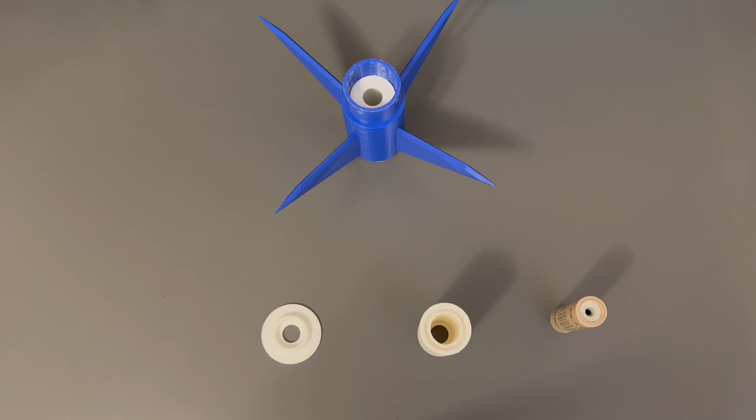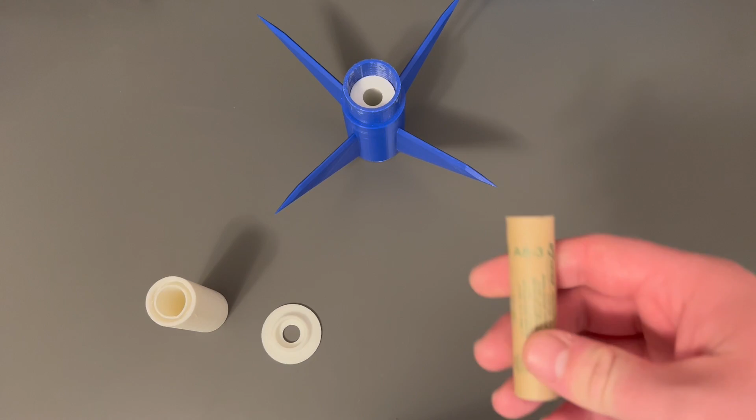Today I'm going to be updating you on the motor mount design that we did in the last video. I went ahead and printed this design and noticed a couple mistakes that I made. First off, let's talk about the fitment of the engine with the motor. If I go ahead and insert the motor here, it's very difficult to get in there.

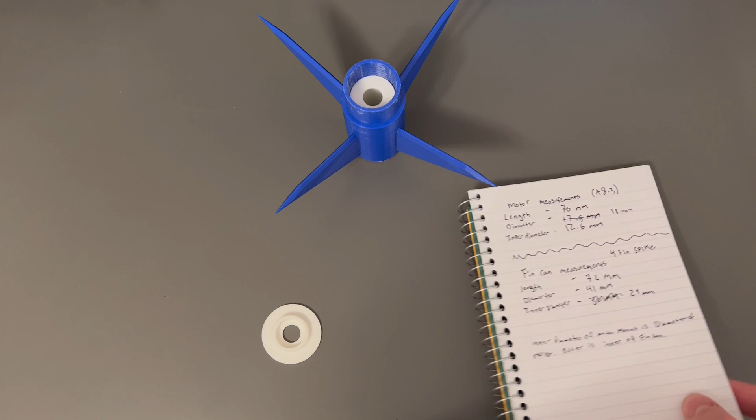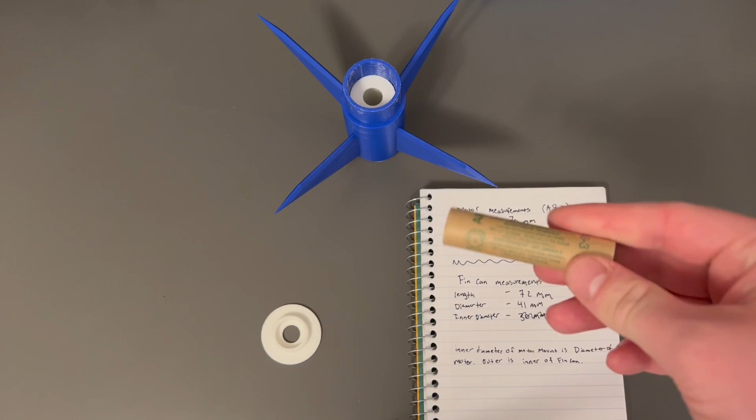That is because if we take a look at the notes we made, I took the diameter of the motor at 17.5, but in actuality it is 18 millimeters. I did some research, and both the A, B, and C motors have an 18 millimeter diameter, so I went ahead and updated that.

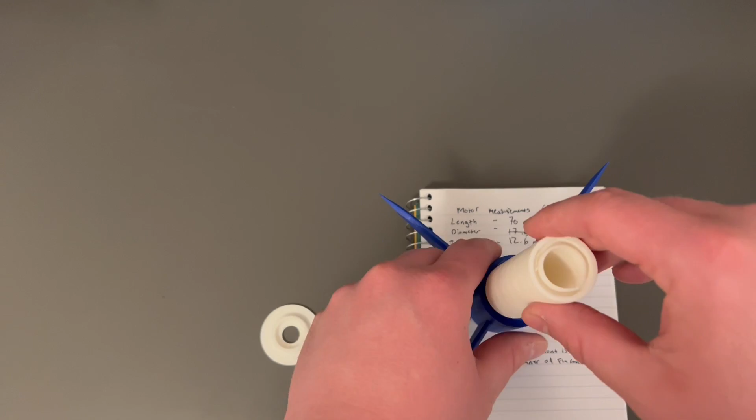Secondly, when I would attempt to put this inside the fin can, I'm going to put it in upside down since I have the other one inserted. It's a very snug fit, which is good because no glue is needed, but it means you can't take it out if needed.

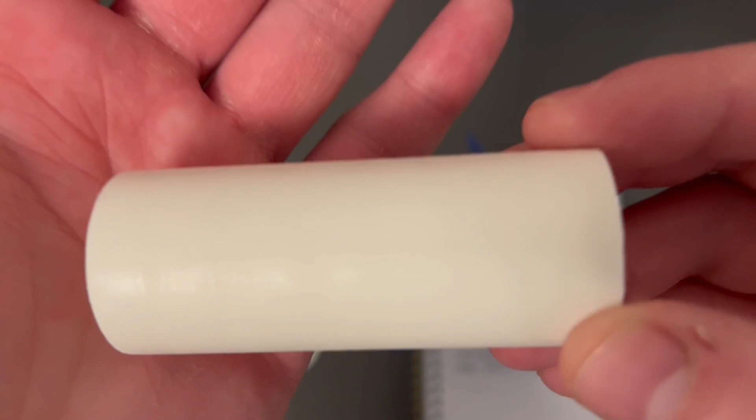And I did go ahead and sand it down a little bit, and you can see some marks where I grabbed it with some pliers.

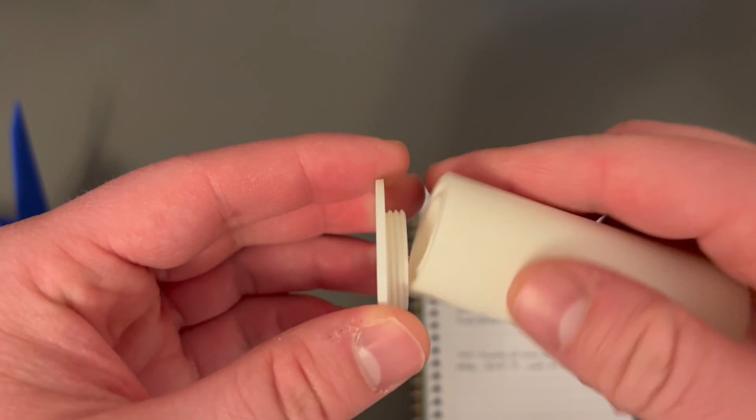I also noticed an error in the printing as well. You can see some stringing in the threads, minus the fact where I grabbed it with some needle nose pliers. So when I would take this and screw it in, it didn't seat in there very well. So I went ahead and updated the design.

Let's take a look at our notes. Like I mentioned earlier, I updated the diameter of the motor from 17.5 to 18 millimeters, which allows the motor to slide in and out easily now.

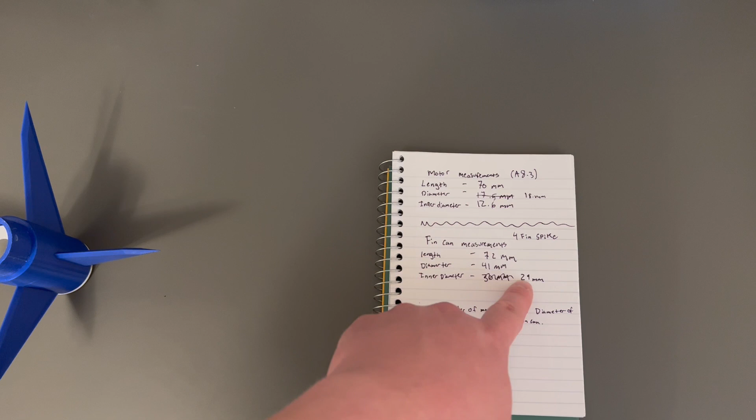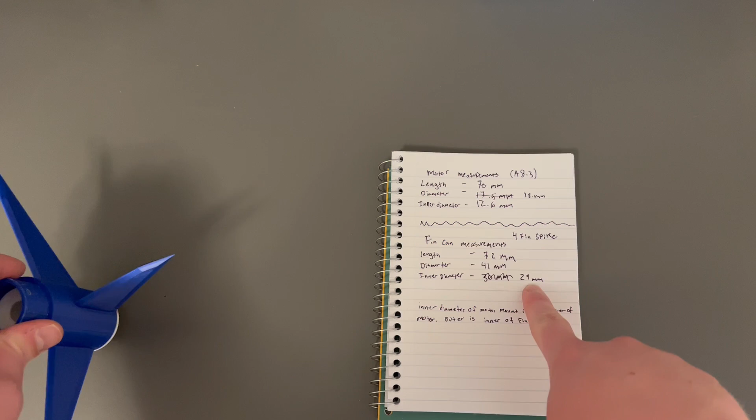I also changed the inner diameter of the fin can, adjusting that parameter to 29 millimeters. This is probably a little bit too big in hindsight because, as you can see, there's a lot of gap around and it can wiggle a little bit. In reality, this should be 29.5 millimeters to get a nice snug fit, but still make sure it can easily go in and out of the fin can.

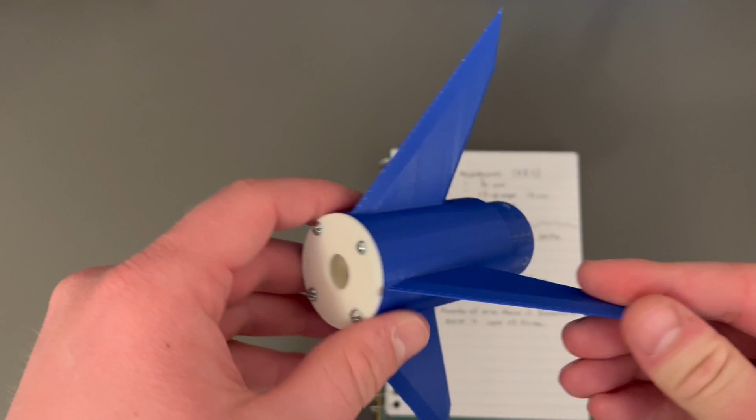So let me go ahead and unscrew this from the fin can and show you how I updated the design to allow for a little easier threading of the retaining nut to the motor mount.

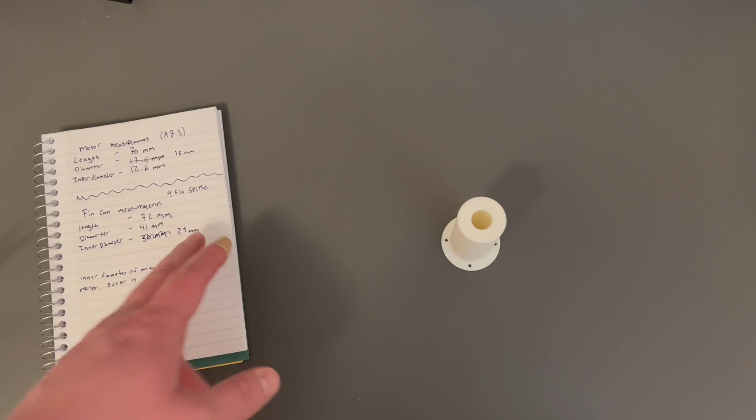Alright, I went ahead and removed the screws from the motor mount. Let's take a look. It slides off real easy, and that's because of the design choice of 29 millimeters instead of 29.5. If I were to update the design for version 2.5, I would add the 0.5 millimeter back so it has a snugger fit into the fin can.

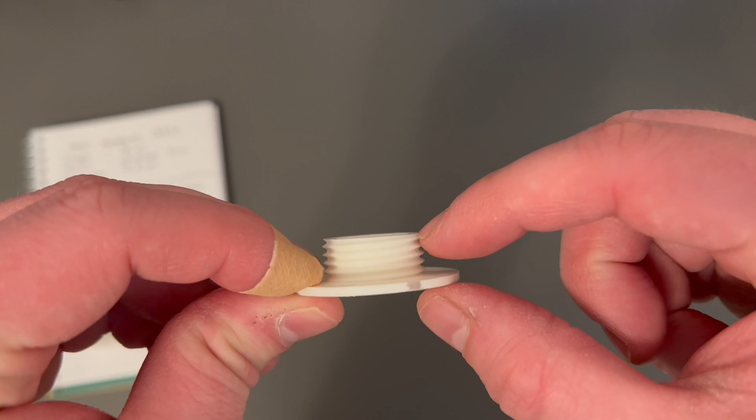Let's take a look at it. Minus the holes, there's quite a bit that's changed for the retaining ring. I went ahead and made the distance of the threads 10 millimeters instead of 5, and we can compare and contrast here. I also updated the size as well.

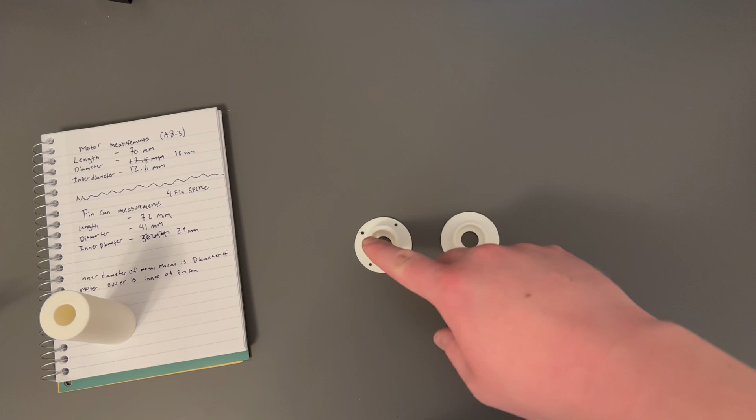You'll notice that this ring is a lot bigger than the new design, and this fits a motor perfectly. If I pick it up, I can hold it, and the motor doesn't fall out easily because it's a nice snug fit. If I put it in this one, there's quite a bit of play, and I cannot just hold the motor with the retaining ring. So I'll go ahead and set this aside.

With this new updated retaining ring design, I made the threads on the motor mount a little bit bigger. You can see how we got rid of the plastic here in between the threads and the motor mount. I added those to the retaining ring and made the threads a little bit bigger and easier to print, so there's no stringing like we had here.

So if we go ahead and install the motor, it just slides right in, and the retaining ring screws right in as well, and it's a perfect fit. Then this just goes right into the fin can like that.

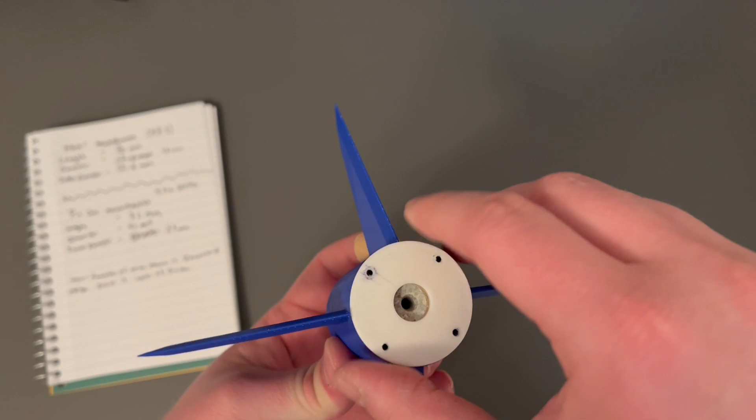And then you add the 4 machine screws that you saw earlier. So that is the updated design of this motor mount.

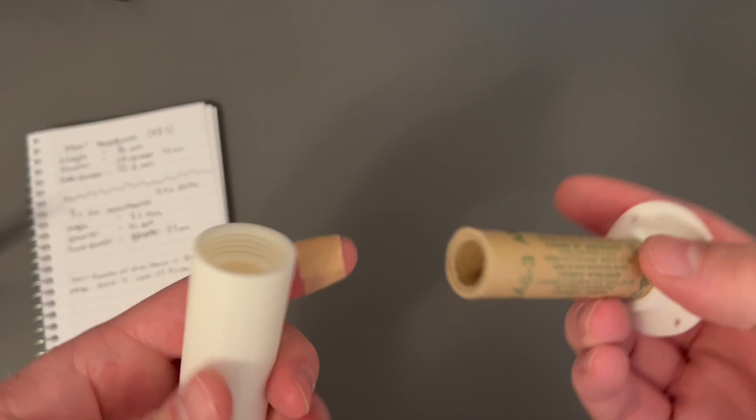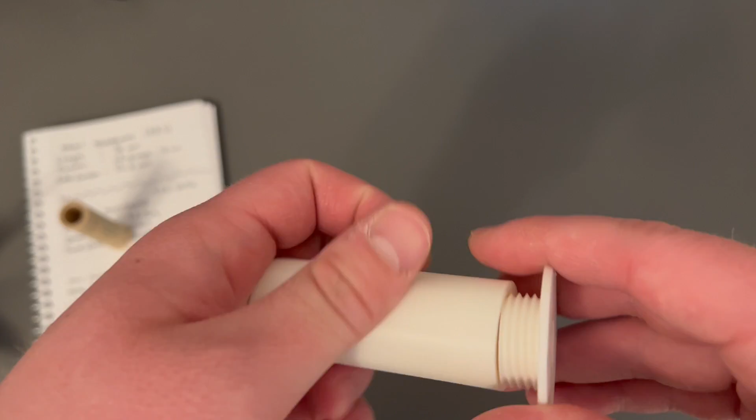I think it is easier to print and easier to use as well, considering the fact that the motor just came out with the retaining ring for easy removal and disposal, and then you can plop a new one in and screw it together if you can line up the threads on the first try. Then lock and load and send her away.